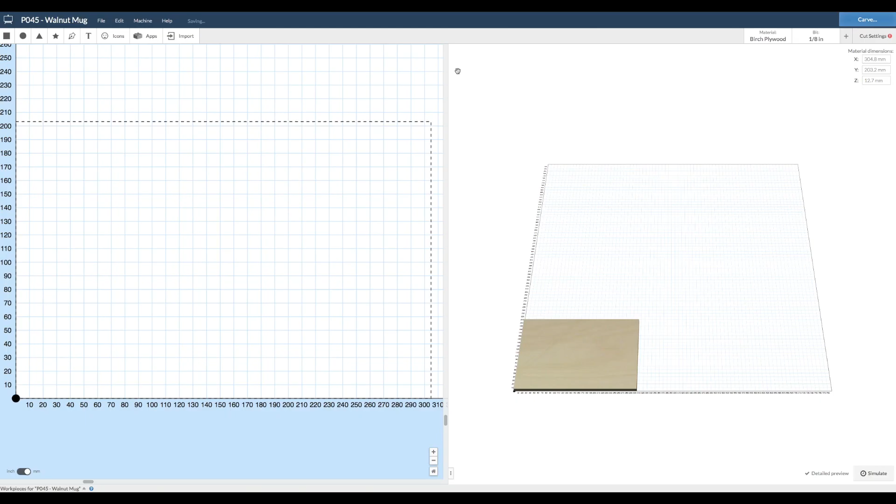I wanted to make a mug that was capable of holding both hot and cold liquids, but I wasn't sure about the food safeness of some wood finishes. So I decided to base the design around an existing thermos where I could remove the metal internals and build a nice wooden housing.

I used my X-Carve, which is a CNC mill, to carve out the rings that would stack up and go around the metal interior. I could have cut the rings out using a bandsaw or a scroll saw, but I didn't have those tools at the time I made the mug.

I'd set the depth of cut a bit too short, so I had to use a Stanley knife to go around and trim out all the rings from the plank of oak that I used.

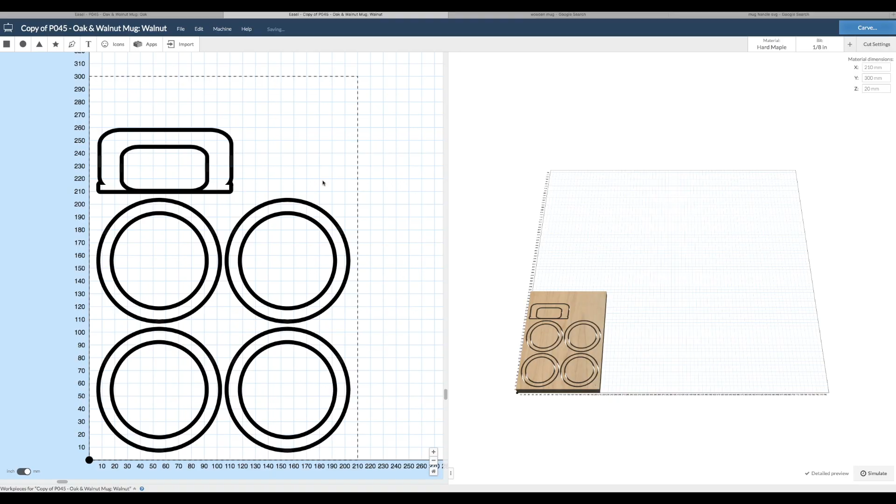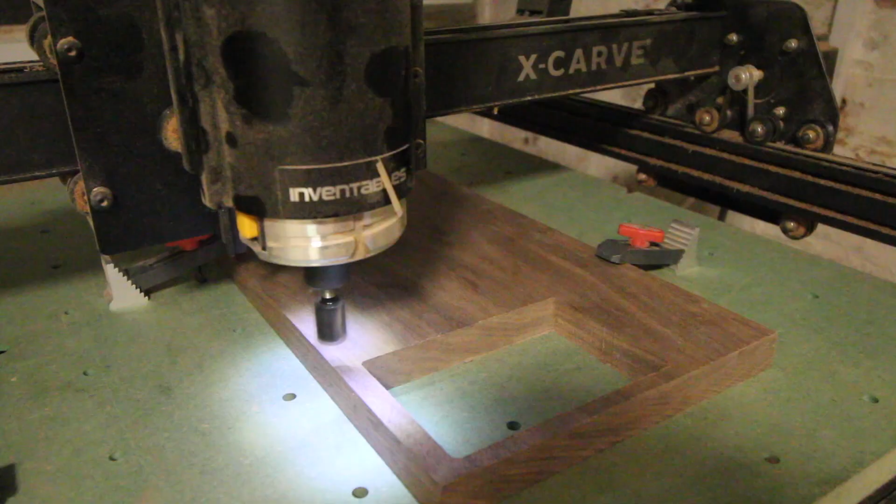I wanted a bit of colour contrast, so I used oak for the first four rings and walnut for the final bottom cap. I had to drill a hole in the centre so that when I pushed the metal thermos interior into the glued stack of wooden rings, air could escape through the bottom. But I probably should have drilled a bigger hole, as you'll see and hear later.

I made sure the rings were cut slightly oversized so I could sand them and file them down to their final dimensions, as it's a lot easier to take material off than it is to add it back on again.

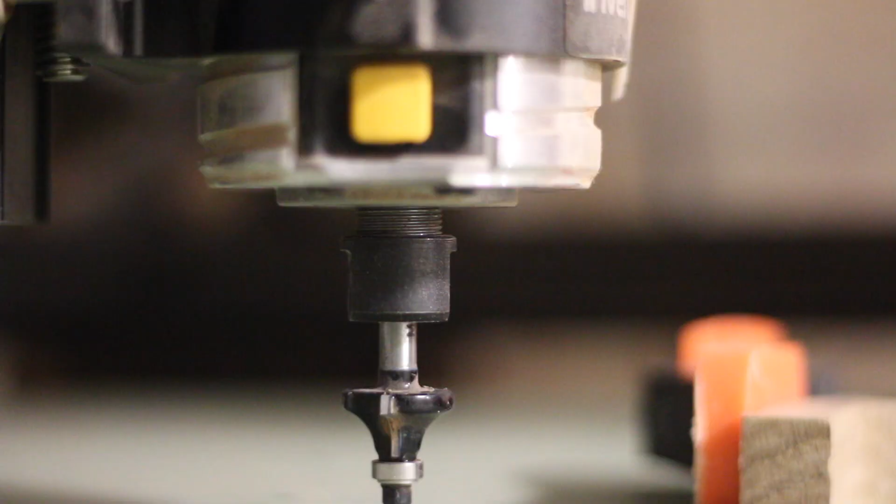I don't currently own a router table, so I used the X-Carve to add a small round over to the handle. I then sanded it down to the radius of the mug using sandpaper on the mug itself and a belt sander.

As I wouldn't be drinking liquids directly from the wooden bit of the mug, it would all be kept in the metal thermos interior, so I could use whatever finish I liked. I used a little bit of Danish oil to bring out the colour of the wood.